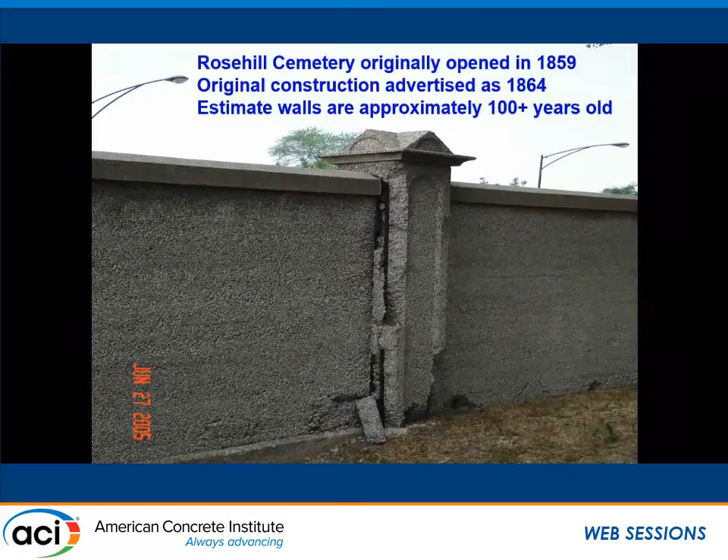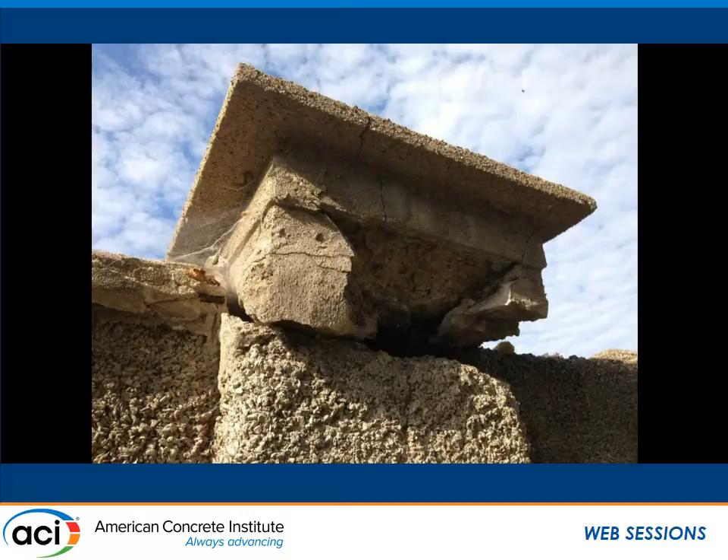Again, like I said, the initial issue was the capstones falling, but they kind of dealt with that. They knocked off the loose ones and then just left it before they knocked the whole thing down. And then I got a little bit of help from ACI staff in some of the initial assumptions.

They said water's going to go right through there anyway, so it should have all kinds of problems from freeze-thaw and corrosion. And Agata Pick found me this article from a February 1950 ACI journal indicating that capillary action into a wall—now they're talking about a rendered wall when you read the bottom of that—doesn't progress into the wall more than one or two aggregate diameters. This aggregate was about 3/8 and 5/8 inch chip, so it's comparable to what this is saying here, but it's saying it resists that—it doesn't help promote flow through the wall, even in a horizontal driven rain.

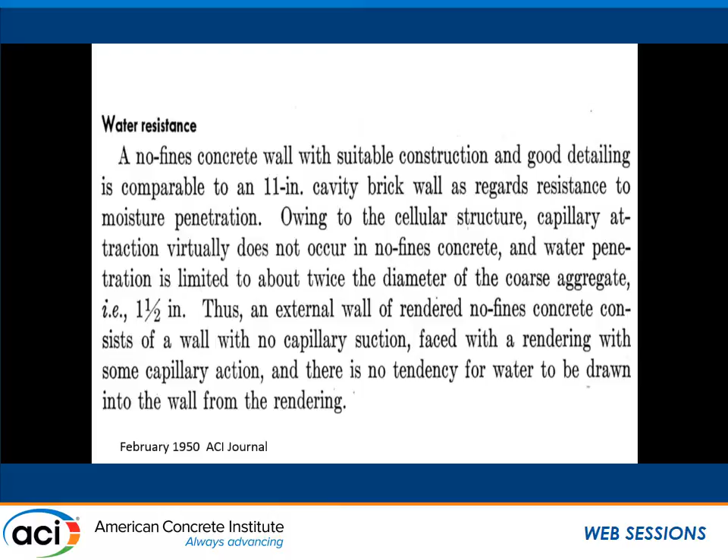The rendering comment is kind of applicable because the bottom portion of the support—let's call it the stem wall or the foundation that this wall sits on—I noticed, oh, that's conventional concrete.

And that's where the drainage party ends. The concrete gets water coming into the wall, comes down vertically, beautifully taking advantage of the 20 to 30% void structure of our Pervious in a way we're not used to seeing it used.

And here you get to see where all the hydraulic stuff happens. It's right out in the open. But then there's some probably lingering of the water leaving because it weeps out the bottom, and that's probably the wettest part of the wall, and that's where the damage started to manifest itself first.

Manifest itself, again, probably sometime around 100 years later. So intuitively, this shouldn't work. And then this is just assumptions on my head, which Dr. Kevin will talk about later, and some of the work that we may do in the future might bear out.

I started to think there's an analogy here to freeze-thaw durability. The air voids there help dissipate the pressure from ice dilation, and here the corrosion product, it's like trying to punch yourself out of a bag that's too big for you. The corrosion products will start to invade the void structure around there, but still that's more time before damage, before sufficient pressure to cause spalling.

I really started getting hyper about looking at these walls a lot more because what's in the background is already them being knocked down and being replaced. And something that's really a historic, dare I say, monument is going to be gone. And I just think that there's something from our forefathers that we can learn. I don't exactly know what it is. I do have one obvious answer, what not to do, but...

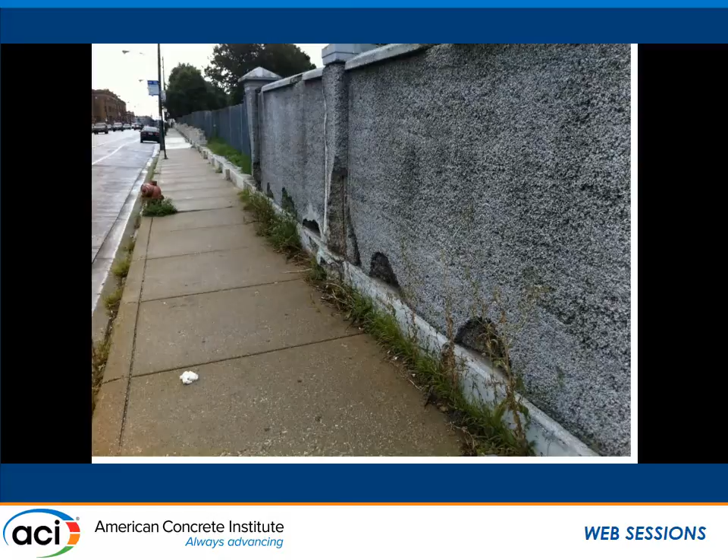So you see this spalling at the bottom, and taking a closer look at it, I mean really bad. It would be to the point where it completely disintegrates. But as you get up above that elevation of the interface between the wall and its foundation, it improved dramatically, and sometimes the twisted bar was completely visible in its original shape.

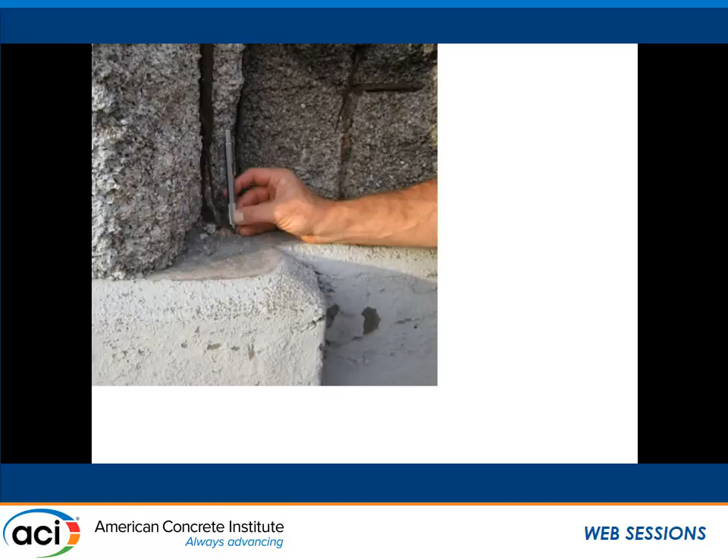I've got hundreds of pictures of these. I should really take the pictures of the people watching me take the pictures.

Not to say that we have drawings, nothing like that's available. Estimated spacing about 12 inches on center vertically. I don't have enough spalls to happen, that's a good thing, on the horizontal spacing. But it did occur there too, mostly where it was repaired. Because it was repaired with conventional mortar, which just started to dam up the system and work against what was so beautiful and letting it work for 100 years or so.

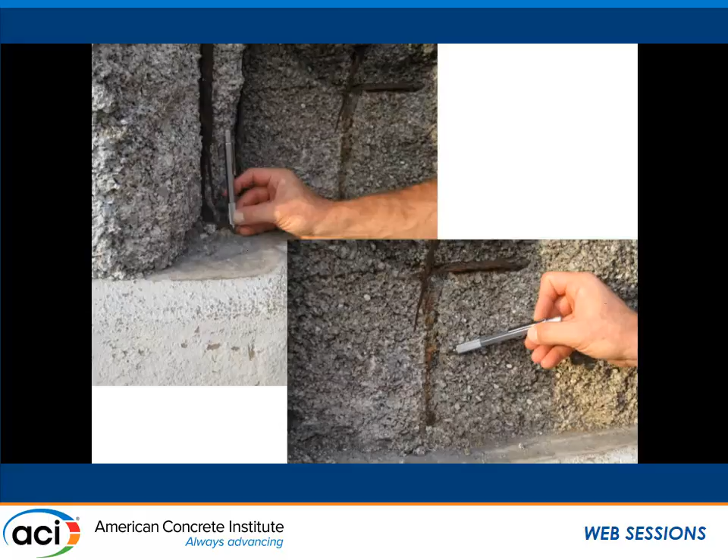I just have this one so you can see it because the video is a little fuzzy. It's real short. I'll play it twice if I can. But the video here just is...

I just took a pencil and scratched it, if it plays. Oh, of course not. I set it up before and it played this morning. Sorry, it's not playing.

But the point is here, the more they fixed it, the worse it got. The whole wall just started to explode. There were areas where it was just so obvious that the doctor was the executioner here.

Looking for an audience that might be receptive to this in concept, I was the dinner speaker in September for ICRI, and I thought this would be fantastic because I was preaching to the choir. They said, 'This is fantastic,' and I said, 'Well, at least they have someone on a kindred level.' So I thought maybe the ICRI Repair Institute might find it interesting. But since they're knocking it down, and this is not a big money item to them, there was... interesting.

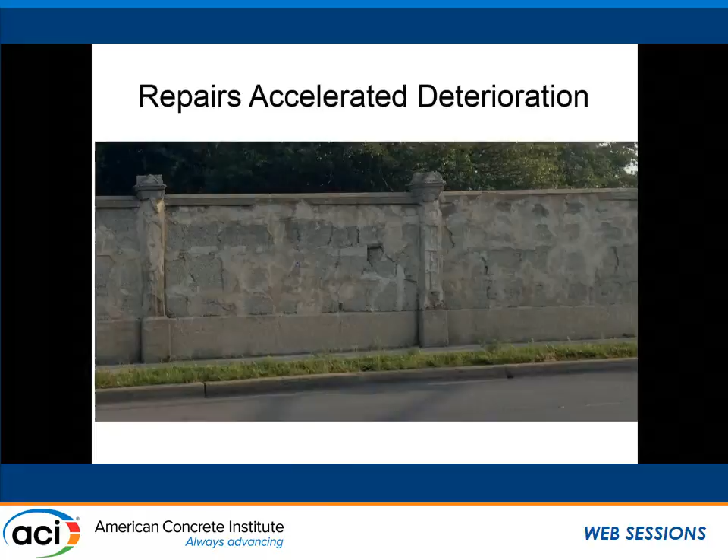Taking a look at a close-up, the petrographer Ron Sturm, who I worked with for many years at CTL, was very gracious to do some analysis, and we got a whole bunch of stuff that we can still get from Ron. But the cement paste, surprisingly, was not thoroughly carbonated.

Very low water-cement ratio, very low in permeability. It's too old to give a real estimate on water-cement ratio, but it's around 0.32 to 0.38, though it's getting old for that. Great paste-aggregate bond, good quality aggregate. Like I said, you can't make up for bad materials.

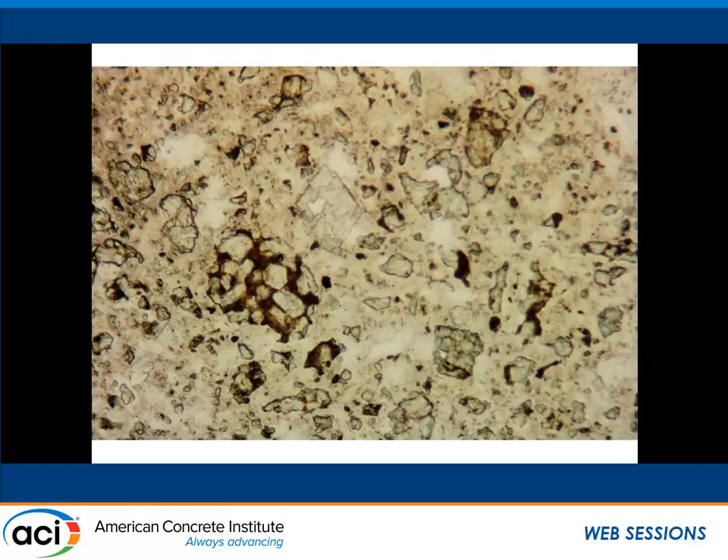A cross-section, to answer your question Dale, about how the aggregates look. It's a 3/8, 5/8 chip, nice aggregate coating, 20 to 30% voids, non-air-entrained.

I was waiting for you to ask questions. I don't know how it was placed. Obviously it wasn't pumped, it was way too early, but they did a very nice job. I see they're not really lift lines, they're just form lines. There were no cold joints to speak of. Your guess is as good as mine how they placed that. I would like to know that.

Anywhere from a bucket might have been possible, or I'm really speculating here, a wheelbarrow on a ramp dumping it, but it'd have to be almost continuous. Overall though, good construction, I think.

Do you think it's possible, George, just from the no-fines mix, that they used it almost as a hand pack? Thank you, Walt. It's not strict no-fines, it's about a 5% estimate on natural sand. Did they add it? That they probably added it? I mean, that's pretty sophisticated, adding such a small amount of sand.

No, it's not just in one or two samples. Every single one we looked at had about 3 to 5% fines in there. Having done a couple of mixes like that too, starting with no fines and adding a little bit, the strengths pick up nicely before you start clogging things.

Yes sir, do you think the repairs were trapping moisture? Absolutely, no doubt whatsoever. That's why I thought maybe ICRI, showing what not to do, would start people thinking about it — it would not just be a walk in the park to fix that.

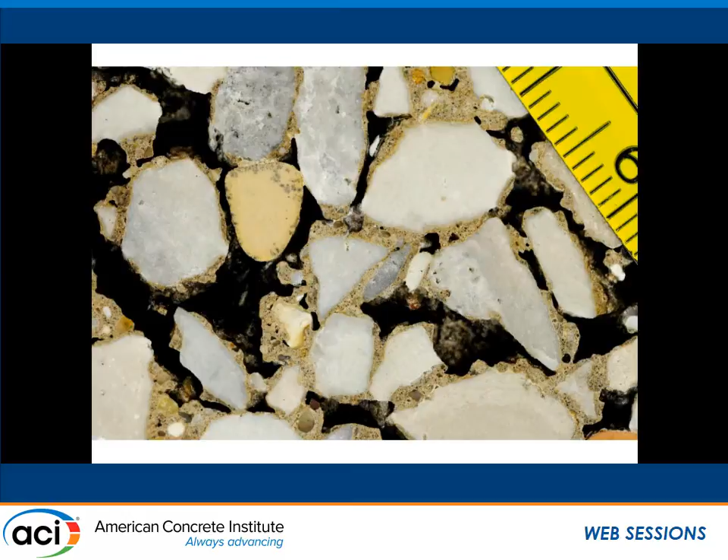It looks very nice when it's new. We know that if we're going to use 318, we want to protect reinforcing steel, we want a low water-to-cement ratio.

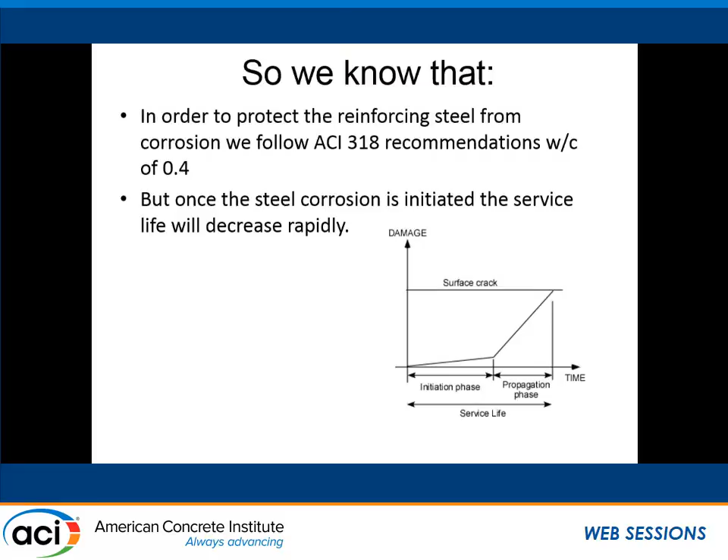This protects it from corrosion, but once corrosion starts, it progresses relatively rapidly. Once it initiates and starts to propagate, we get cracks, it splits open, water gets in there, and things fall apart quickly. So we said, okay, maybe one of the theories for why this has lasted so long is because it hasn't split open. It's corroded in there, but we've got a lot of pore space, so it's oozing into the pore space. Maybe that's what's happening.

So we set up this Florida test method, the accelerated Florida test method. This is what we call the lollipop test. We take some rebar, stick it in a concrete cylinder, put that cylinder in a sodium chloride salt bath, and then run a current between the solution and the steel to force the chlorides to it.

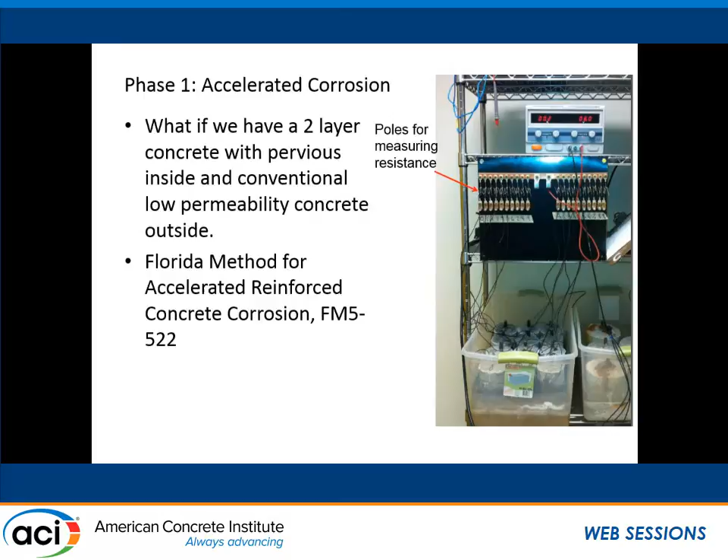We can proportionally evaluate time to corrosion. Love this test because we can initiate full corrosion destruction in 2 to 3 weeks. It's a great fun test. What happens is you run a current, and once it passivates, the current drops. Then the second you get some cracking, your current goes up because you're basically mainlining to the steel.

So here we did some 2-layer samples. We did regular concrete, and then we did one with a pervious core with conventional concrete placed around it. With the pervious core, we had a real hard time initiating or seeing cracking in those samples.

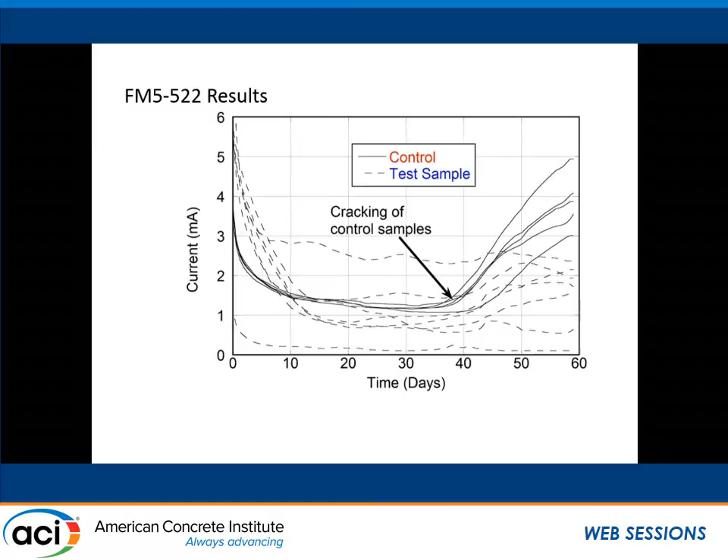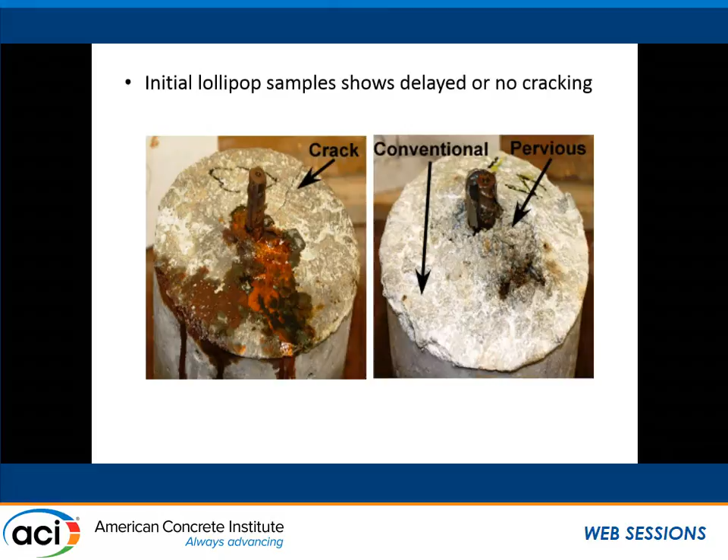So here's our conventional sample. You get corrosion, it splits, and the corrosion product goes everywhere. Here's the pervious core. We have corrosion, and we can see corrosion products kind of bubbling out the top, but we didn't split it. So then we saw cut them: here's our conventional, it definitely expanded and split. Our pervious sample definitely expanded into those pervious voids.

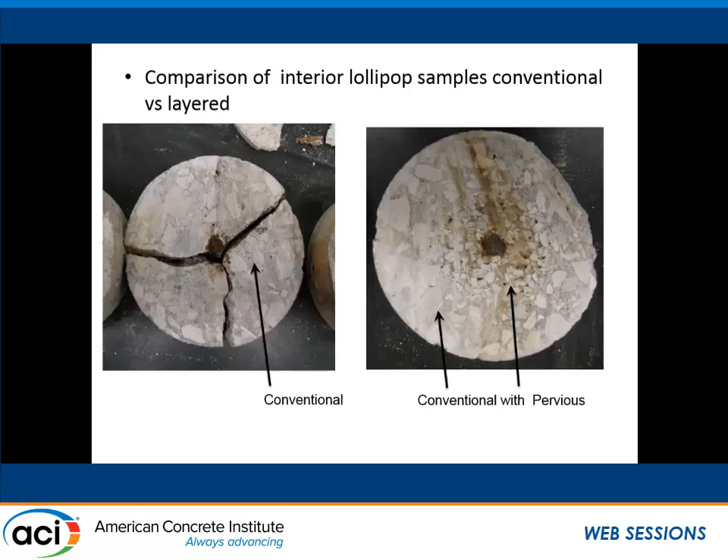So you say, okay, maybe that's interesting, let's progress to the next stage. We're actually doing some ponded corrosion potential testing, long-term testing right now, where we've got a conventional layer of concrete, a layer of pervious with some steel in it, and then another conventional layer - about 2 inches, 2 inches, 2 inches. We've got a PVC pipe on top that we use to pond a chloride solution, and then we measure the corrosion potential of what's happening.

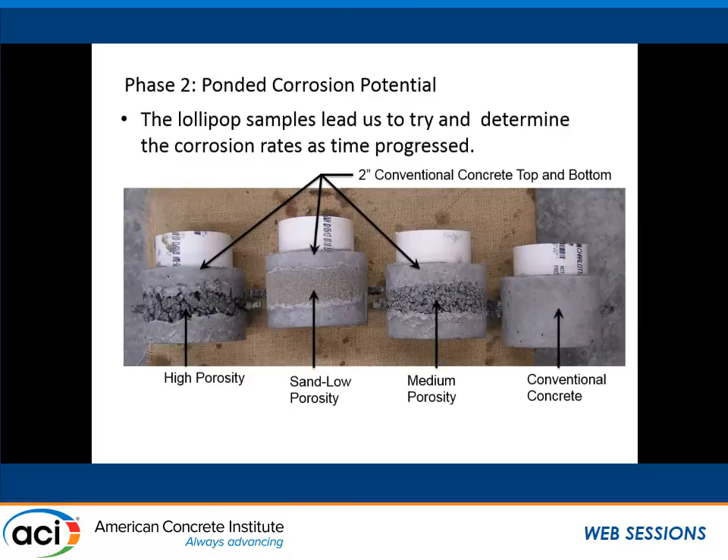So we did a very high porosity coarse pervious, a medium porosity 3/8 pervious, and a lower porosity sand-only pervious concrete, plus a control. We've got rebar running through the middle of all those samples. You pond chloride solution for 2 weeks, pour it off, let it dry out, and do dry-wet cycles - kind of a worst case scenario for corrosion. Then you test it with linear polarization.

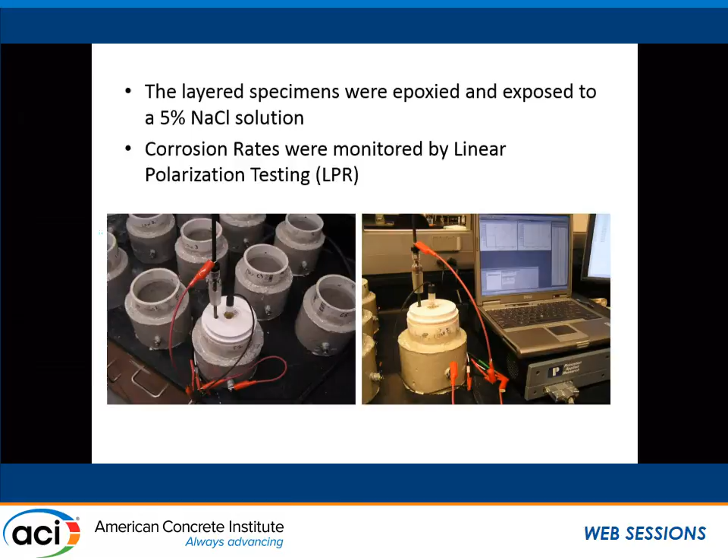The sides are all wrapped in epoxy, so we don't have any moisture movement in or out of it - it's 1D diffusion. So we've got a whole bunch of samples we've been running for a long time now. Just to show you what we look at, we're way out at 300 days now, getting ready - we've been testing for almost a year.

But typically what happens is initially you get a spike in current because your steel is passivating. Once you get that passive coating, it drops down. Then once corrosion initiates, it spikes up - we say if it's above 1 microamp, then we have corrosion happening.

So here's our high porosity pervious - really low. Here's our conventional. Low porosity pervious, a little bit higher but still low. Here's our medium pervious, still low. So looking at these, we haven't initiated corrosion in any of these samples yet, but we do see that the pervious system has a much lower potential at this point.

We've got humidity sensors in there, and we've got much lower humidity in the pervious layer than in the conventional concrete layer. So something's happening. What we're going to do is once we hit a year, we'll take half of the samples and induce a voltage, or drive a current through them, to try to accelerate things and see if we can differentiate between them.

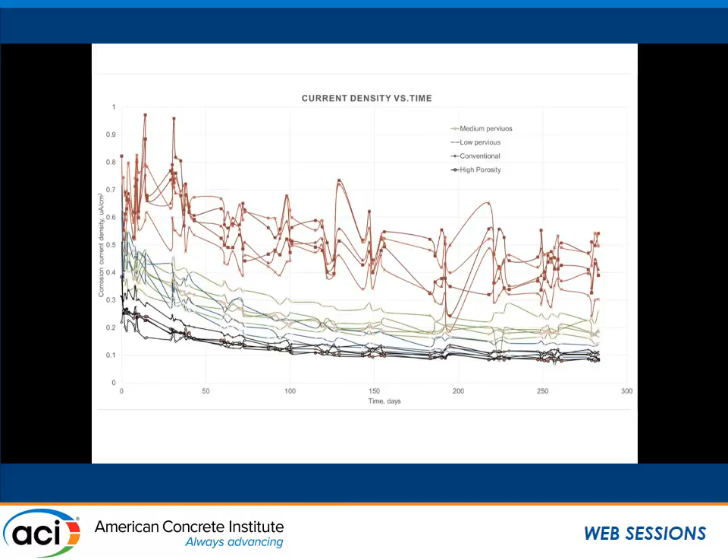So this is of special interest - off to the field, we said, hey, let's try some stuff on the side, and we made some lollipop samples. It seems to help in the lollipop samples. We're doing some linear polarization testing, and it seems to be better. We're getting ready, before Thanksgiving, to place some very large reinforced concrete beams with the 2-layer system, and we're going to break them to look at bonding behavior - it's kind of a side piece based on what George has shown us.